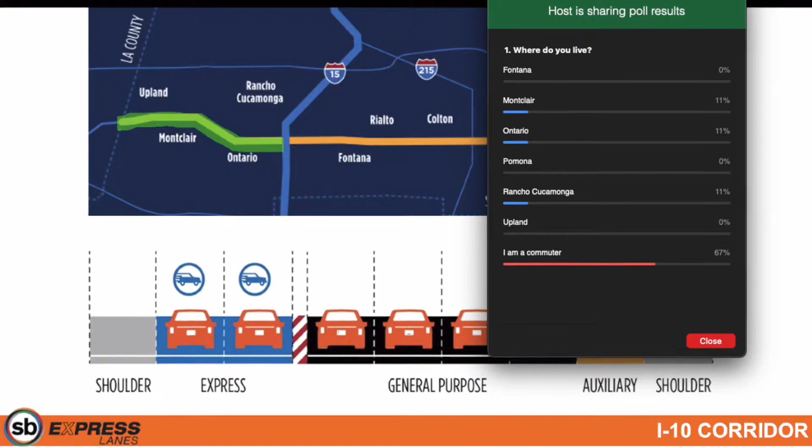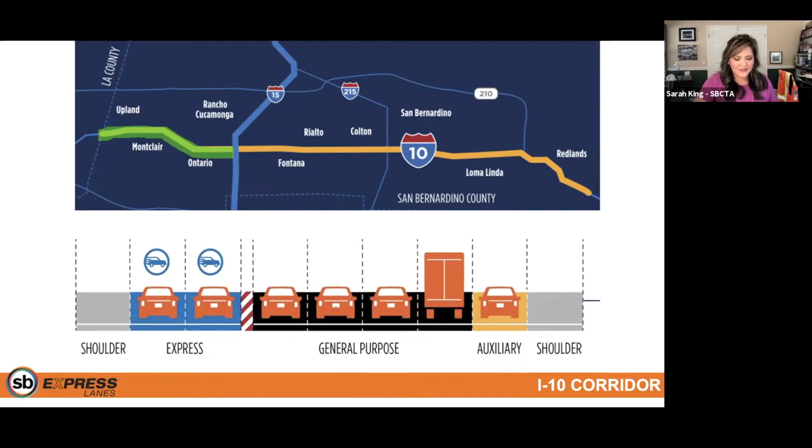Madison, can we take a look at our poll results? Oh wow, okay, so we've got 67% of you indicating you're a commuter, a few of you from Montclair, Ontario, Rancho Cucamonga. We've been hosting these webinars since the start of the year, and we're glad to see some local folks, but more importantly, because this is a regional project, it's nice to see there are others outside of the immediate project area. Thank you again for joining us today.

So express lanes are not new to Southern California. However, the I-10 express lanes will be the first express lanes in San Bernardino County. There are express lanes in our neighboring counties, such as the 91 in Orange and Riverside, the I-15 express lanes that just opened in Riverside County, the 10 and the 110 express lanes up in Los Angeles, the toll roads of Orange County, as well as express lanes even further south in San Diego County.

So Madison, can we launch our next poll question? Which express lanes have you used in Southern California? So now, what's all the hype about express lanes? Well, they offer a choice to drivers, and they relieve congestion and provide trip reliability throughout the corridor. They benefit all drivers because those who choose to pay to use the express lanes also end up freeing up space in the general purpose lanes.

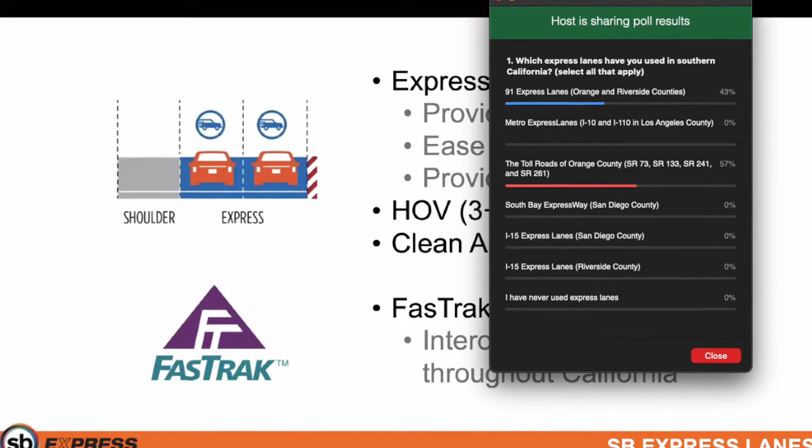Madison, let's take a look at our poll results. Most of you have used the 91 express lanes, and then there are the toll roads of Orange County. Thanks for responding to that poll.

For those of you who selected that you've used the 91 or the toll roads, you likely have a FasTrak account with one of those agencies, or at least I hope so, because if you don't, you might be receiving a notice of toll evasion. But because you have a FasTrak account, you'd be all set to travel on the SB Express lanes when they open, since FasTrak is used to collect tolls on every tolled bridge, lane, and road in the state of California. It's interoperable throughout all of the toll facilities within the state.

A pre-established FasTrak account will be required to pay for tolls and to receive the lowest toll price on the SB Express lanes. Now, if you don't have a FasTrak account, and maybe you're just visiting someone in San Bernardino County or traveling through on the I-10, but bottom line, you'd likely be an infrequent user of these express lanes, then you will be able to pay for tolls online within 5 days after your trip using what we call a pay online feature, just inputting your license plate. That's a really unique feature not currently used on any express lane in Southern California, but it will be an enhancement for those infrequent users of the SB Express lanes in San Bernardino County.

Madison, can we launch our next poll? We're asking, how many passengers do you typically travel with?

If you'd like to be eligible for toll discounts and pay the lowest toll amount while using the I-10 express lanes, you will need a FasTrak account and specifically a switchable transponder to be able to declare how many passengers are traveling with you. If you have 3 or more people in your vehicle, or if you drive a clean air vehicle or ride a motorcycle, you will be able to use the express lanes at no or low cost. Others may choose to pay a toll and use express lanes as an alternative to the general purpose lanes.

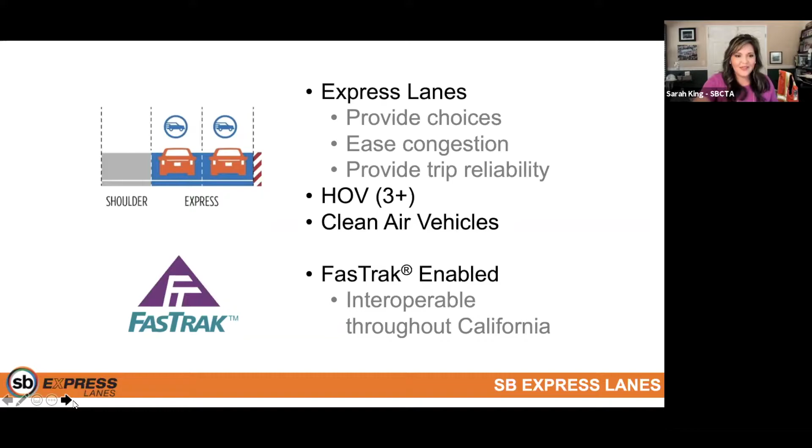So let's dive into the focus of today's webinar, the construction milestones. Construction occurs during daytime and nighttime hours and involves work in the lanes, on and off ramps, along the shoulder to the freeway, and even our local streets and roads. There are 18 bridges within the corridor that are either being replaced, widened, or improved to accommodate for the widening of the freeway to add the express lanes.

Retaining walls and sound walls are coming down and going right back up. Crews are rehabilitating the main line, and lots of utilities are being relocated. Lanes are also being shifted or narrowed, and if you travel within this area, which many of you indicated you are commuters, hopefully you're traveling along this I-10 freeway area, you may see lots of different types of construction equipment and vehicles entering and exiting the freeway as part of this project.

But let's take a little closer look. This slide captures just a few seconds of our groundbreaking video, which can be found online at gosbcta.com/I-10corridor. It provides a bird's eye view of the project corridor. I'm going to hit play here.

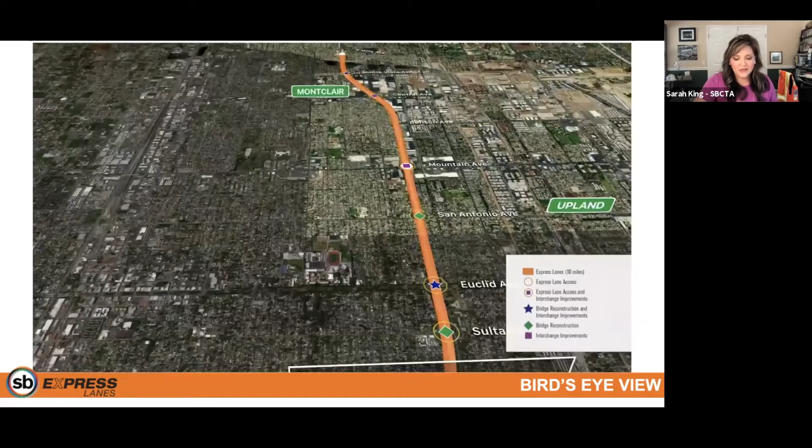With more than 230,000 commuters traveling the I-10 corridor every single day, the SB Express lanes will offer local and regional drivers connectivity throughout the Southern California Express Lane system. I'm going to play this video one more time while I keep speaking. What you'll see here is the area where interchanges will be improved, and the different bridges we're working on.

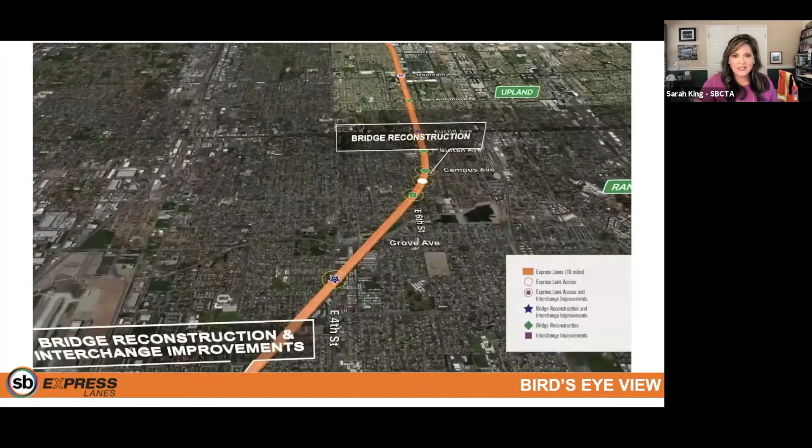Increased mobility is needed not only to improve access throughout our local cities and communities here, but throughout the region, and this project brings us one step closer to that. The project will also address the most significant mainline bottlenecks for people and goods in San Bernardino County and improve speed and reliability for all of our drivers.

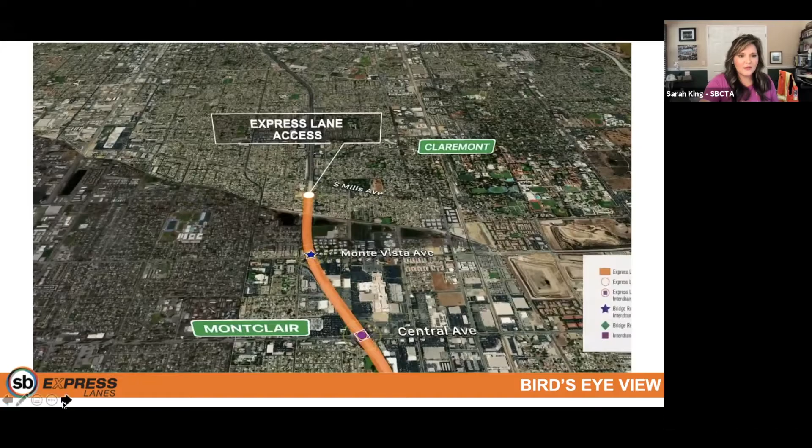Now, similar to Campus Avenue is the 6th Street Bridge, which just closed yesterday, June 28th, and crews closed access over 6th Street Bridge to all vehicle, pedestrian, and bicycle traffic to allow crews to prepare for demolition. Demolition is anticipated to occur in mid-July, and utility relocation is currently underway between Campus Avenue and Holmes Court during daytime and nighttime hours.

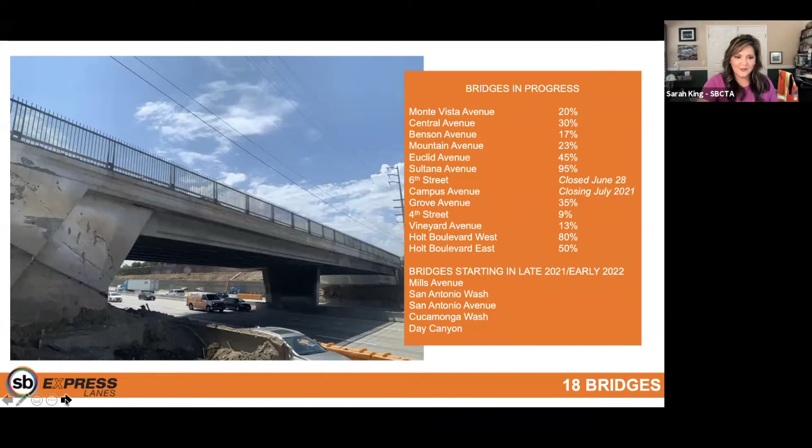Now, crews continue to build the new Sultana Avenue Bridge over I-10, and we are just weeks away from welcoming back motorists and pedestrians across the newly constructed bridge. This is an exciting milestone because this was the first bridge to come down as part of this project back in 2020. It's an opportunity for us to reconnect residents and businesses and provide that access to key destinations and local schools within the area.

The new bridge will be the same configuration as the previous bridge, one lane in each direction, with pedestrian walkways on both sides. So right here, you can see our crews parked on top of the new deck, or the surface of the new bridge. The dirt that you see in the photo behind the chain link fence here, that's where the approaches will go to connect the new bridge to the Sultana Avenue roadway, which is where this photo was taken from. On the right photo, you see the inside makings of an outside barrier and a pedestrian sidewalk. It's really coming together, and we're just a couple weeks away from being able to welcome back the community over this new bridge.

Now I think I'd be remiss if I don't mention this. As many of you know, construction is dynamic and has many variables that impact the delivery of a project, especially one as large as this. These can include weather delays, equipment impacts, scheduling conflicts, environmental delays, and this year, especially, the global pandemic. We were supposed to open this a little earlier than anticipated. As I shared, we're just a couple weeks away, but we appreciate the local community's patience throughout construction and any of the unforeseen scheduled delays as part of Sultana Avenue.

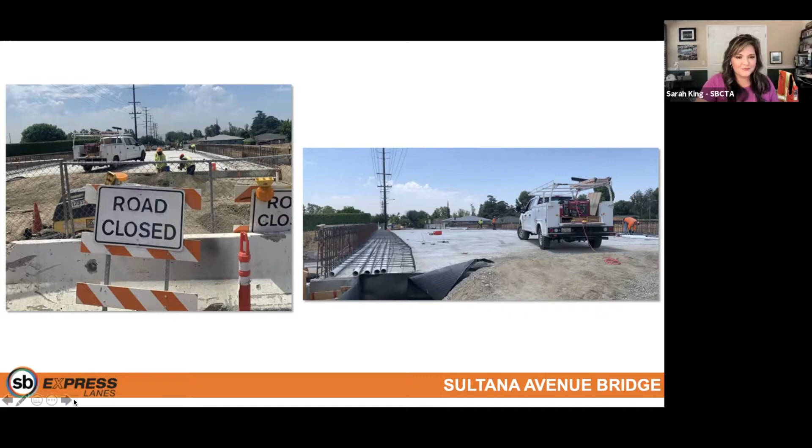Now, crews continue to relocate underground utilities at 4th Street and are building a new wider section of the eastbound side of the freeway. Work on 4th Street began in spring of last year and will last approximately 2 years. For those who live in this area, 4th Street between El Dorado Avenue and Vineyard Avenue is reduced to one lane during daytime hours, and 4th Street under I-10 will be intermittently closed during nighttime hours.

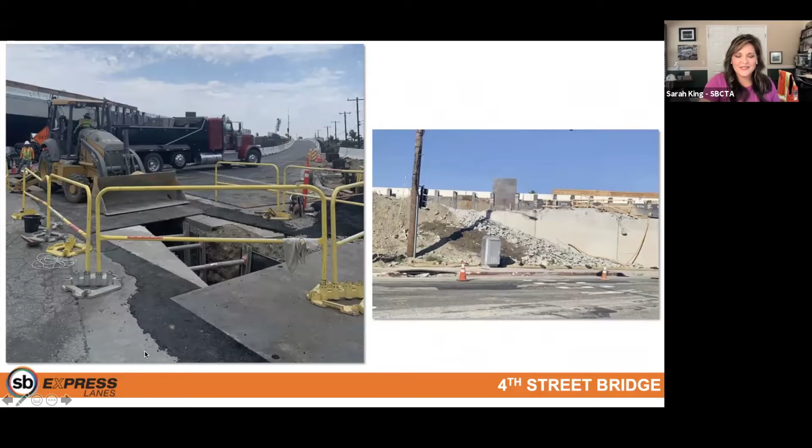Detour routes are posted, and daytime and nighttime activities include forming portions of the bridge and utility installation. Utility installation is some of the activity you see here in this left photo. On the right, well, we don't see any crews currently in that photo, but we see the construction progress of a retaining wall on the eastbound side of the on and off ramps for the I-10.

Now, crews continue to relocate underground utilities at Monte Vista Avenue and are building a new wider section of the eastbound side of the freeway. Work on Monte Vista Avenue began in spring of 2020 and will last approximately 3 years. Monte Vista Avenue under I-10 is reduced to one lane in each direction during daytime hours and will be intermittently closed during nighttime hours. Girder installation took place at Monte Vista, and that's the photo you see here.

If you had an opportunity to join us at a previous webinar, we discussed some of the technical language used for construction projects and the types of closures covered as part of this project, including girders. A girder is a concrete beam that you see here in this photo, and that essentially connects the abutments to the bents to form a bridge. The abutments, as I shared on the last couple of slides, are the outside supports of the bridge, and the bents are the columns in the middle of the freeway holding up the bridge.

So together with the girders, that's what actually supports the weight of the bridge for us to be able to travel over it. Now, in late July, girders will be installed at the Mountain Avenue Bridge.

Last year, crews removed a portion of the eastbound I-10 shoulder over at Mountain Avenue. So as part of girder installation, if you live or work near Mountain Avenue and travel in that area, please watch our construction alerts, because there are some closures anticipated for the girder installation.

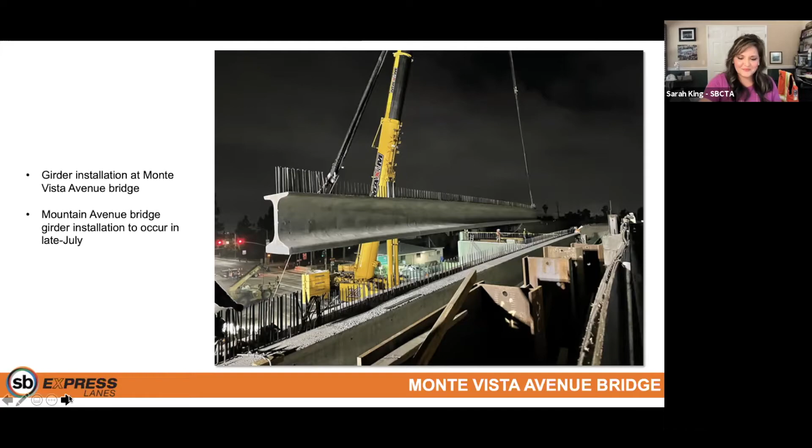Now, because we're widening the footprint of the freeway, our crews also need to take down and rebuild all the retaining walls and sound walls between the neighborhoods and the freeway. As part of this work, they're also relocating utilities and removing trees on several local streets adjacent to the I-10. This photo shows crews working with rebar, putting together a retaining wall.

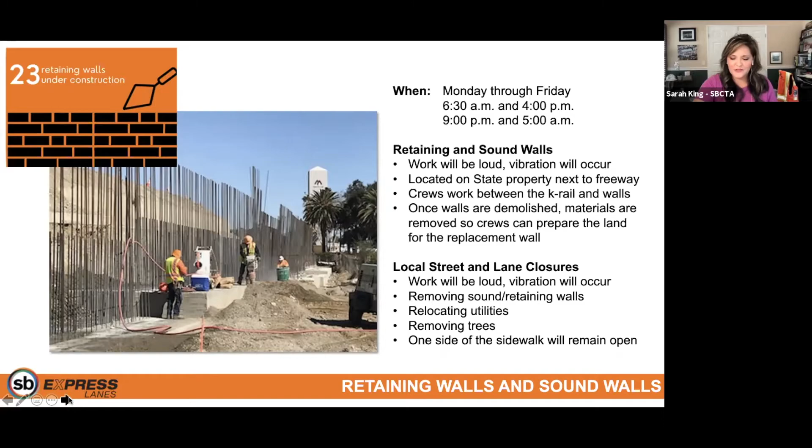As part of that activity, we have daytime and nighttime closures typically scheduled during weekdays only. So while your commute on the I-10 may look different, local residents may also see lanes on their local streets and roads that are closed. That's the coordination taking place both on the freeway and our local streets. We're currently working on 23 retaining walls under construction as part of this project.

Now, there are about 40 on and off ramps throughout the project corridor. As I shared, it's a 10-mile stretch of the I-10. Several multi-day ramp closures are scheduled to realign and repave the ramps to match the newly widened freeway configuration. Here's a snapshot of some of the different on and off ramps being worked on. We understand that lane closures, in addition to local ramp closures, might be an inconvenience.

But they are necessary for our crews to place K-rail, which you see here on the very left side, set up traffic control, and get their crews and equipment in there to repave and realign that ramp. So it is necessary work as part of this project.

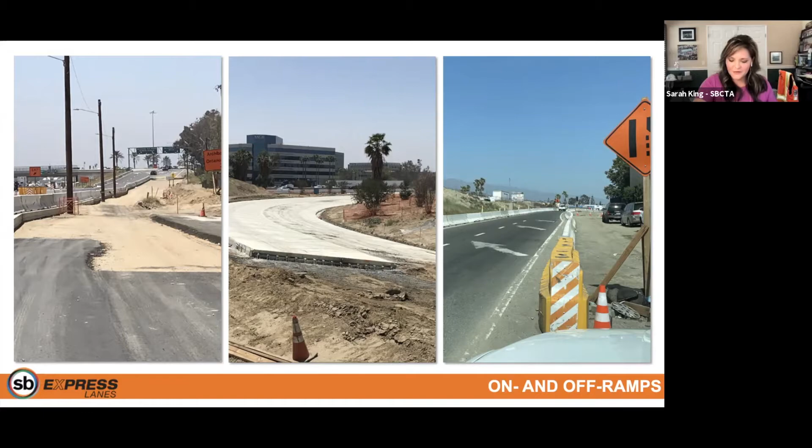On Thursday, July 1st, just in a couple days, we will be opening the Haven Avenue westbound loop on-ramp after having it closed for 10 days. There are several more multi-day closures planned over the next 2 years as part of this project, so please watch our construction alerts for those notifications.

Now, 55-hour closures, which are part of our pavement rehabilitation effort, typically take place between a Friday night and a Monday morning, and they're planned throughout the duration of this project.

So while not necessarily a full freeway closure, I don't want to scare anybody, the 55-hour closures are specific lane closures. The freeway will still remain open and provide access, but we always recommend finding alternate routes during this time so you don't get caught up in a detour or additional congestion that's part of this closure.

But they still impact your commute, so again, they are unfortunately necessary as part of the project, but we always ask that you plan ahead. So far, we've completed 5 of the 55-hour lane closures, and it's really necessary to repave the old pavement to make a better drive for you and your commute.

And a portion of that closure also includes the cure time of the concrete, to let it harden or dry before welcoming back vehicles to travel over that new surface. There will be several more 55-hour lane closures planned as part of the project, but again, we will always include that information as far in advance as possible in our construction alerts for your advance notification.

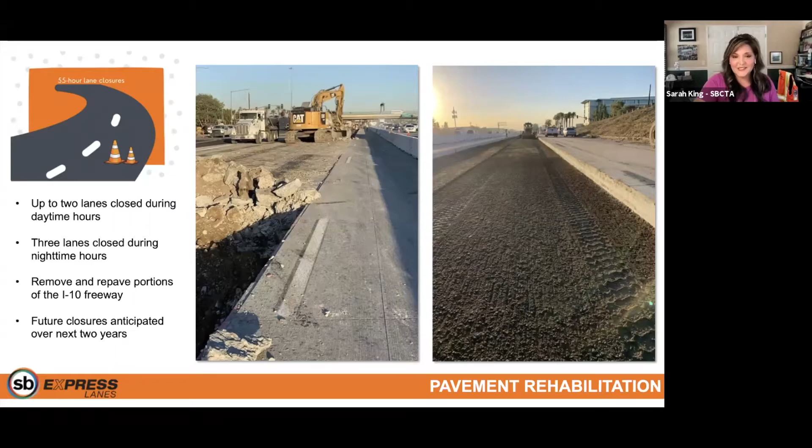Right, so we're in the home stretch of our webinar. The next couple of slides focus on our community outreach and the tools available to help you navigate our project. Our team and our project can be found in a variety of ways, and we are available to you every single day of the week.

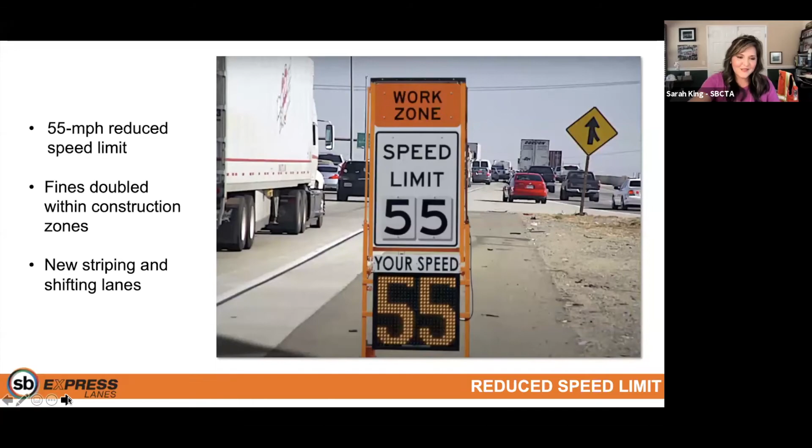And so with that, Madison, have you seen any questions come through? Do we have any time to address some of those topics or themes?

Hi Sarah, thanks so much. It looks like we had a couple of specific questions come through that our team has handled via the chat feature, and it doesn't look like we have any global questions at this time. Tim, would you like to add anything?

Yeah, just kind of piggyback on a couple of things that Sarah offered during the presentation, and thank everybody for attending. And Annette, I really thank you for attending every month and being a good partner with us out in the community. We'll make sure that we track down those things that you're looking for related to your property.

Nonetheless, there's a few things I did want to highlight. Sarah talked about lane and on and off ramp closures and the inconvenience that goes with that. One of the things our project team, the construction team, has been challenged to do is try to keep as many lanes open as possible during the day. So when we talk about those lane closures and ramp closures, a lot of that is at night. There are some daytime necessities at times, those 55-hour weekend related types of things that are necessary to do the work that's needed, but a lot of that's at night.